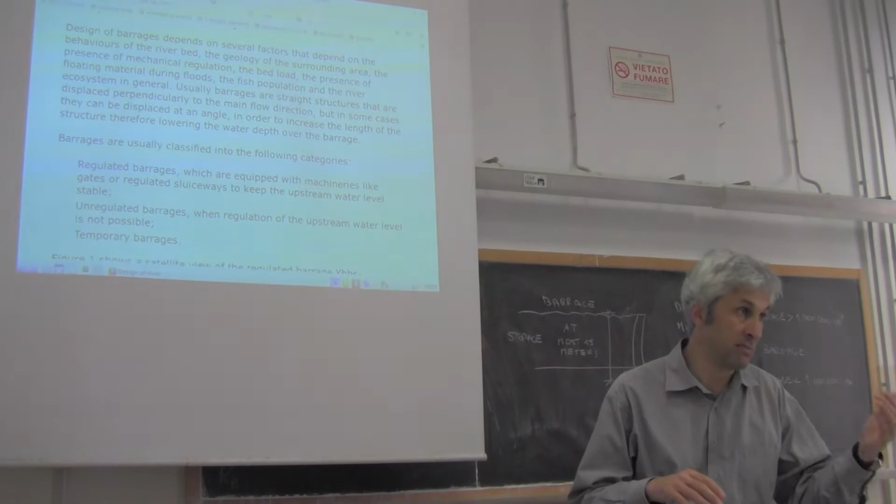Also the environmental impact. There are areas where we need to strictly minimize it. It depends on the accessibility of the place, if it is readily accessible with trucks, with machineries or not. So there are several issues that we have to take into account.

Basically, we concentrate on the hydraulic design. We don't concentrate on the structural design. We don't speak about how to design the concrete structure. We focus, as I said, on the hydraulic design.

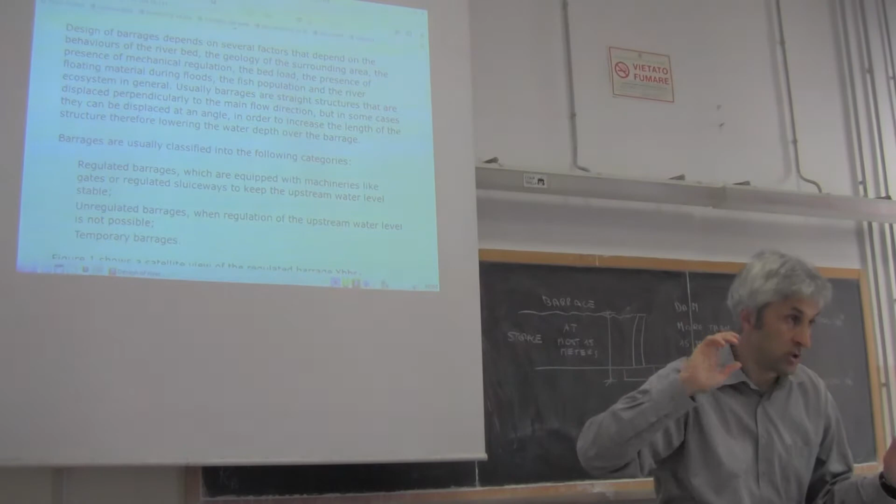First of all, let's take into account that barrages are divided into three categories. The last one, temporary barrages, we don't consider because usually they don't need to be designed. They are frequently used by farmers, for instance.

What they do is at the end of the winter, during the low flow season, they go over the river and with stones, they typically build small dams by putting stones one above the other, diverting part of the flow into canals made every year to divert water to the fields where they need water for irrigation. They are frequently used. Usually they are not designed.

Keep in mind that in order to do this, at least in Italy, we should always apply and ask permission, because water in Italy and in most countries is a public good and therefore cannot be used without asking permission. This is a problem because it frequently happens that people, sometimes in good faith, take water without applying for it and without asking permission.

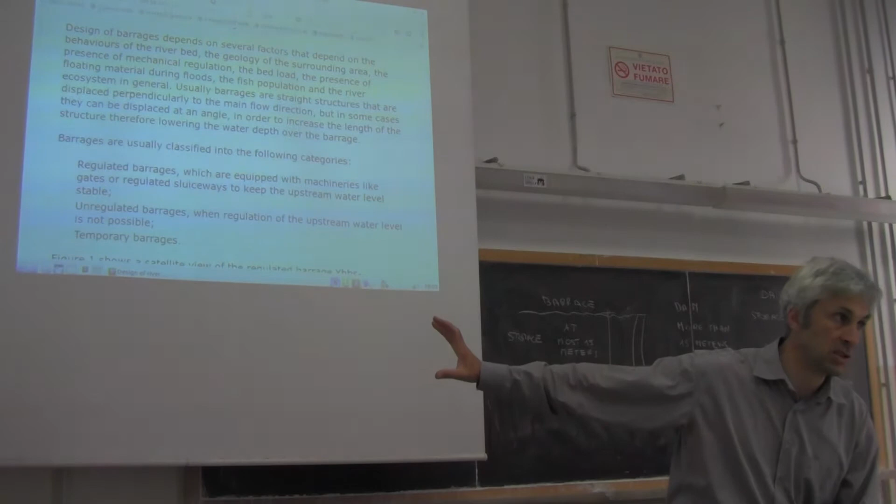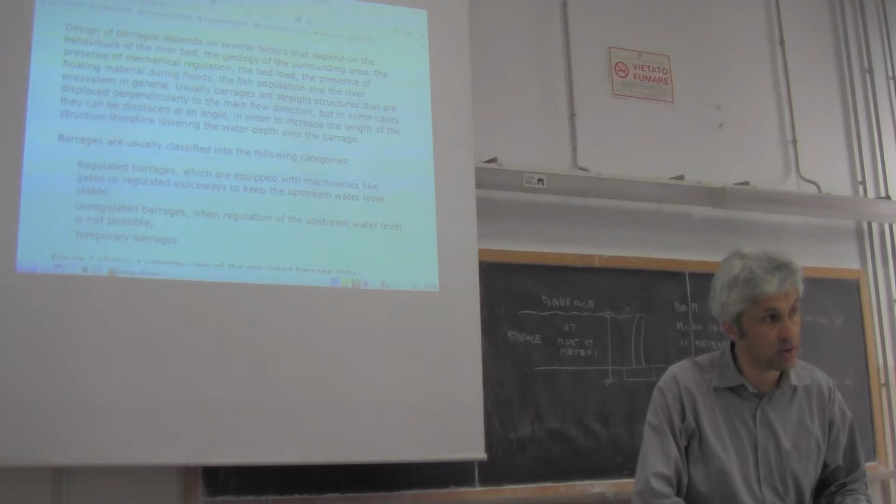Then there are the two categories of permanent barrages, which are regulated and unregulated ones. The difference is that regulated barrages are equipped with machineries like gates or regulated sluiceways. Sluiceways are, in essence, ways where the water passes through the barrage. They can be different types: bottom discharges, weirs. Basically they are passages, and these sluiceways can be regulated because you may equip the sluiceway with a gate. A gate, in Italian called paratoia, is a way to block the passage of water.

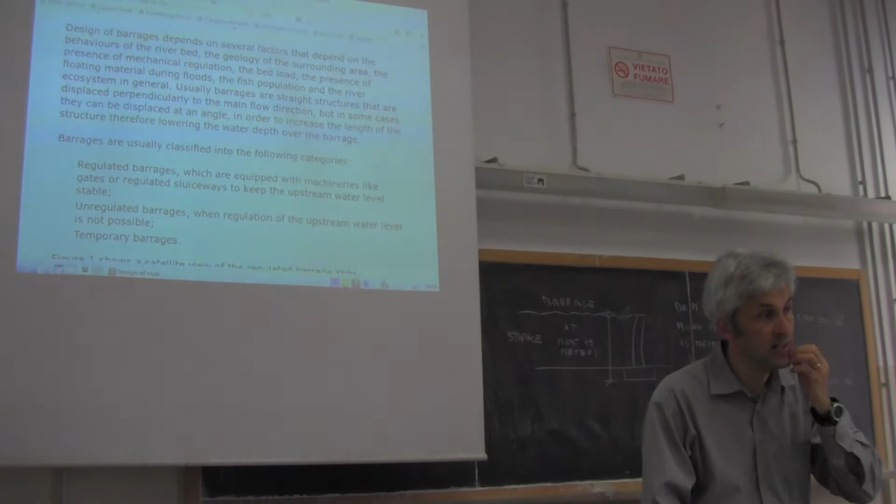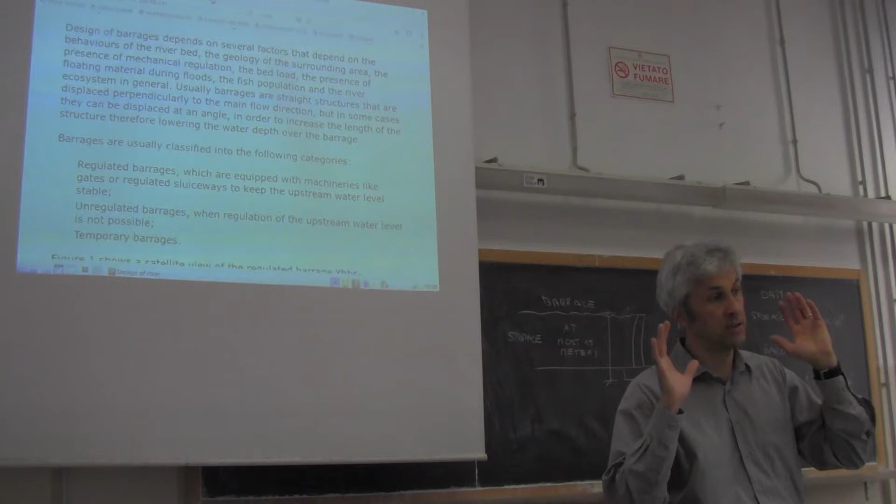What is the meaning of a regulated barrage? It means that if you want to keep the water level upstream at a constant position, with no change during winter or summer, you have to regulate the flow by opening or closing gates. When you get a lot of water from upstream, you open the gates because you don't want the water level to raise up over a certain limit. When you get reduced flow or no flow, you need to close the gates, because if you want to keep the water level with no inflow, you need to close the gates, or almost closed. This is the purpose of a regulated barrage.

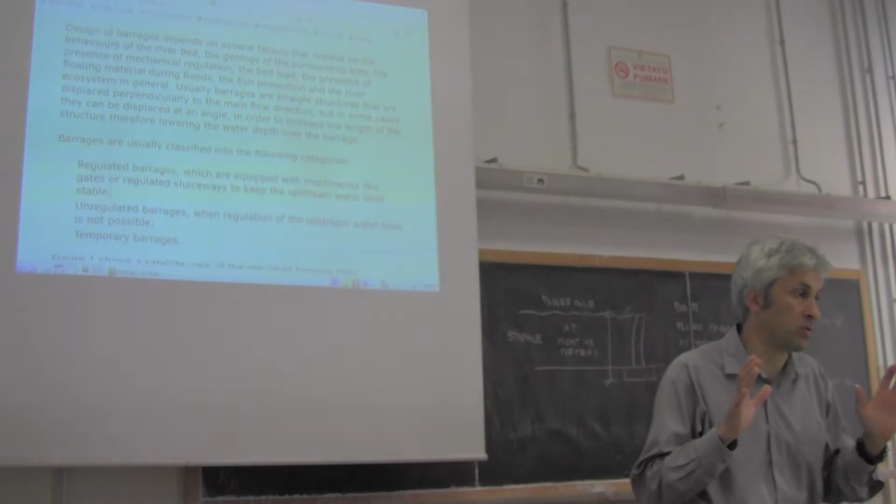Of course, the regulated barrage requires maintenance and management, because somebody, either through a computer code or directly, needs to open and close the gates. Now they are managed in an automatic way, but still there is some human intervention required, at least to check that everything is going fine. So it's a bit complicated. The management is complicated. We require human resources, and we require resources in general.

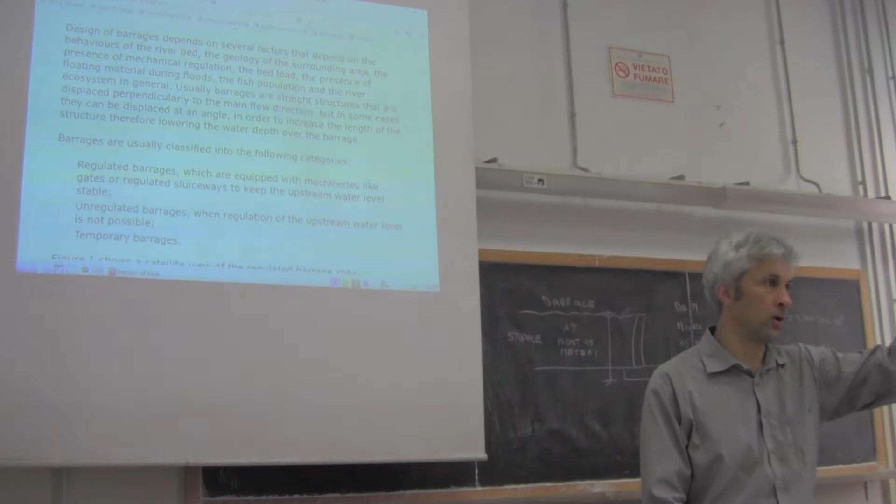Unregulated barrages have no regulation, so less requirements for resources, simpler management, but we have to take into account that the water level upstream may change. When there is a lot of flow, we have the water level raising. When there is low flow, the water level is decreasing, of course, like in a natural river.

So some people say that unregulated barrages are less impacting because there is almost no change in the dynamic of the river. There is a change because you take some water, but still there is variability in the river. Variability, keep in mind, is important for the preservation of the ecosystem. The ecosystem is trained against variability, and if you suppress variability, the ecosystem suffers.

Some people say that unregulated barrages are more dangerous because there is no control, so if you get a lot of flow from upstream, the water level rises both upstream and downstream. A dam, which is regulated, has to store water during winter and release it during summer, and has the advantage that downstream regulation also helps prevent floods.

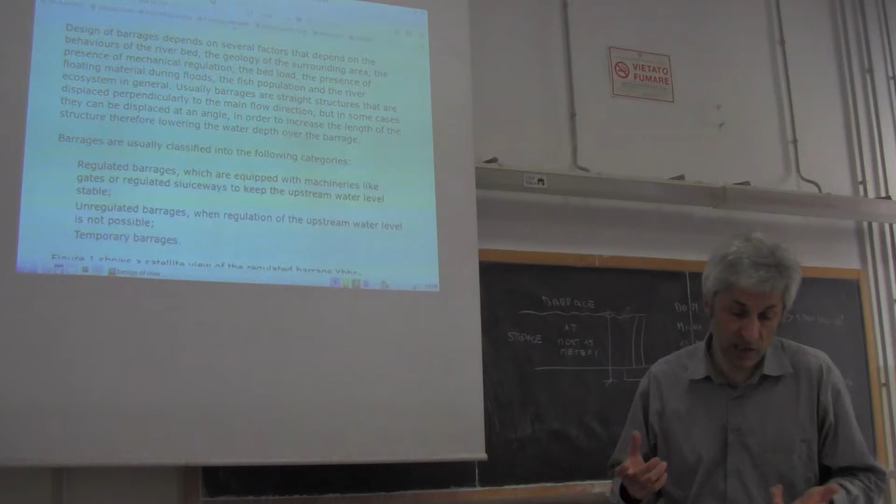So the dam is not only a risk, it may offer some reduction of risk in particular situations. When a huge flood is coming upstream, if the dam has the capacity to store water, the river flow downstream is reduced, meaning a decrease of risk. It's basically a compensation, and the rule of thumb is that when you work on a huge river with an important structure aiming to capture a lot of water, regulation is needed.

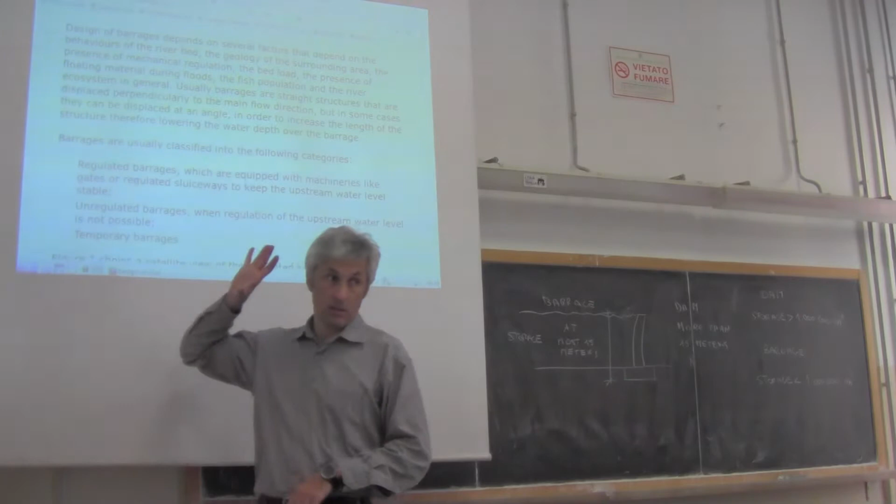When you work on mountain rivers with small infrastructures, we tend to make them unregulated because they are cheaper and the maintenance is simpler. We focus on unregulated ones because these are the structures most frequently designed.

Today there is increasing interest in small hydropower plants and in using surface water for irrigation, because of the development of agriculture and the water-food-energy nexus, which requires getting more renewable energy in a sustainability context. Hydropower is a renewable, clean energy. There is some impact, but it's considered clean.

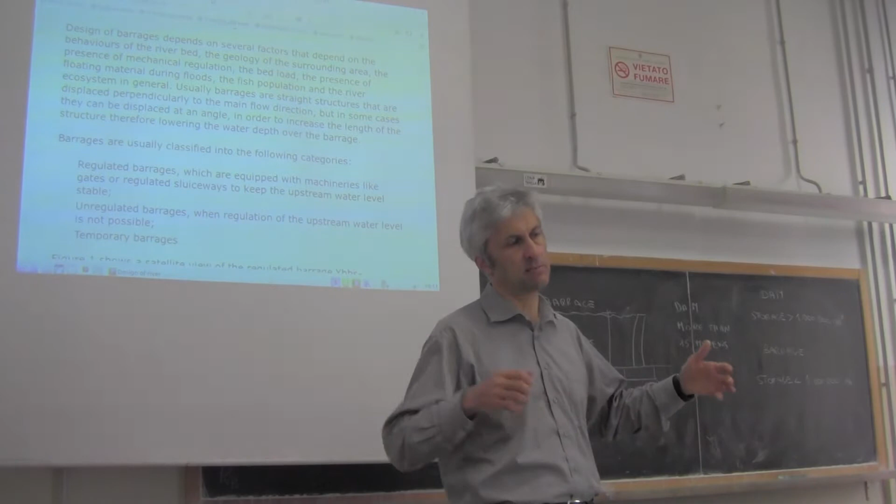These small hydropower plants are often composed of a turbine and also a river barrage that allows water to be withdrawn. Therefore there are a lot of opportunities for designing these small structures.

Regulated barrages, big structures over big rivers, were built a lot in the past. We realized that the environmental impact is very severe, and therefore today they are less frequently designed. Keep in mind that all the big rivers of Europe are regulated, with one exception: the Po River.

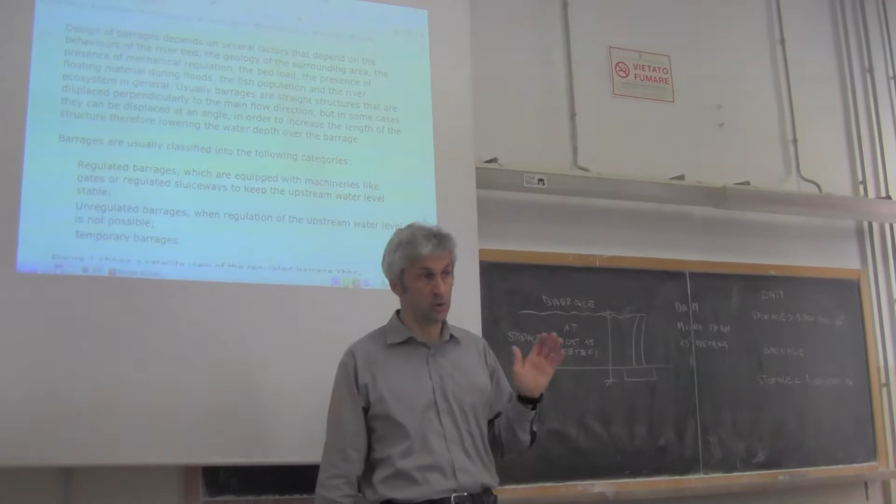Along the Po River there is only one big barrage, the hydropower plant of Isola Serafini. It's the only one. There were plans for barraging the Po River, even recently.

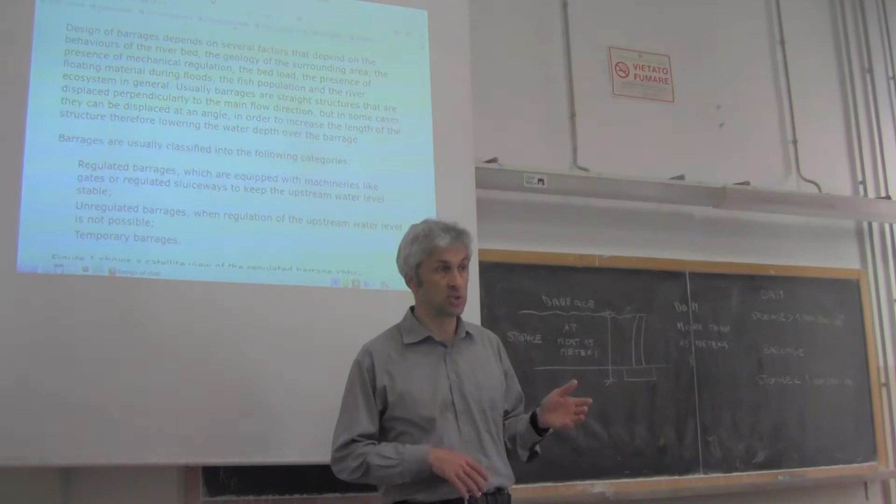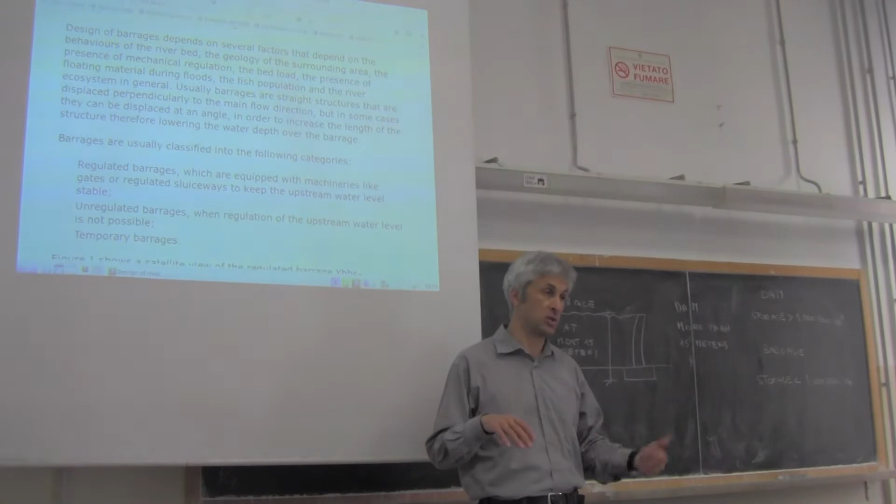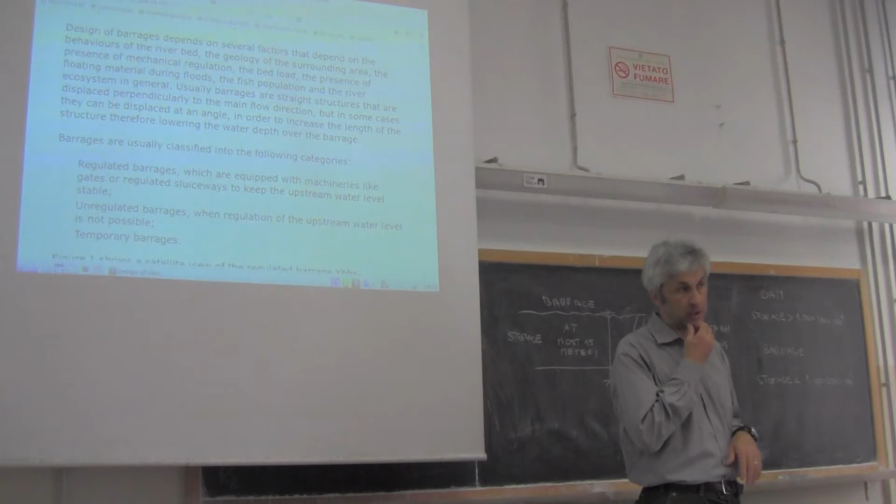But there were concerns related to environmental impact, because we observed on other rivers like the Danube and the Rhine in Germany, which were equipped with a lot of barrages also to favor navigation, that the impact is extremely relevant. There is reduced variability and reduction of river flow, because you need to store water to ensure navigation. As a result, the river flow is reduced and the concentration of pollutants increases. So there are several concerns.

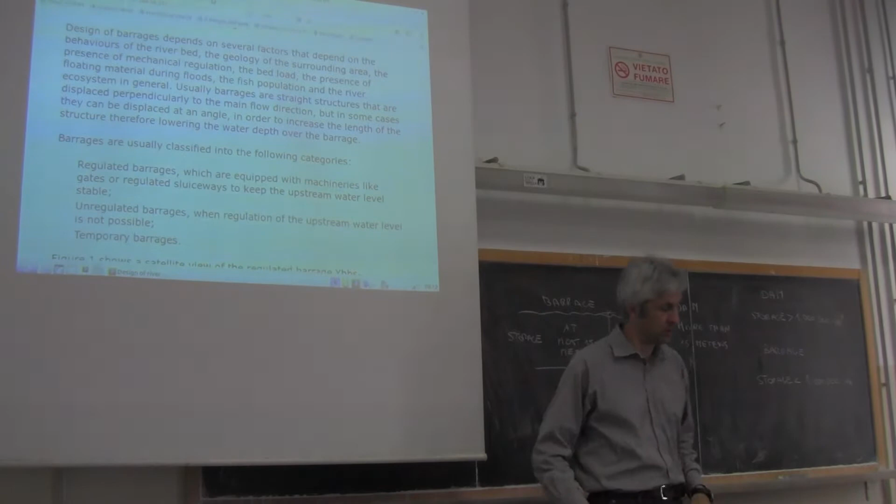Okay, let's have a look at this figure, which is a link on Google Earth. You can zoom it, and this is a barrage over the Danube, with the name of the barrage shown here.

What's interesting here is to zoom it, because you can get to a level of detail that is extremely refined. You can see there is a road that passes over the barrage, and you see the gates here. These are equipped with gates because it's regulated.

On the two sides, the Danube draws the border here, I think between Hungary and another country, we'll check it, it's not really important. There are two hydropower plants, one on each side, to make sure that the two neighboring states can both use this barrage for producing hydropower.

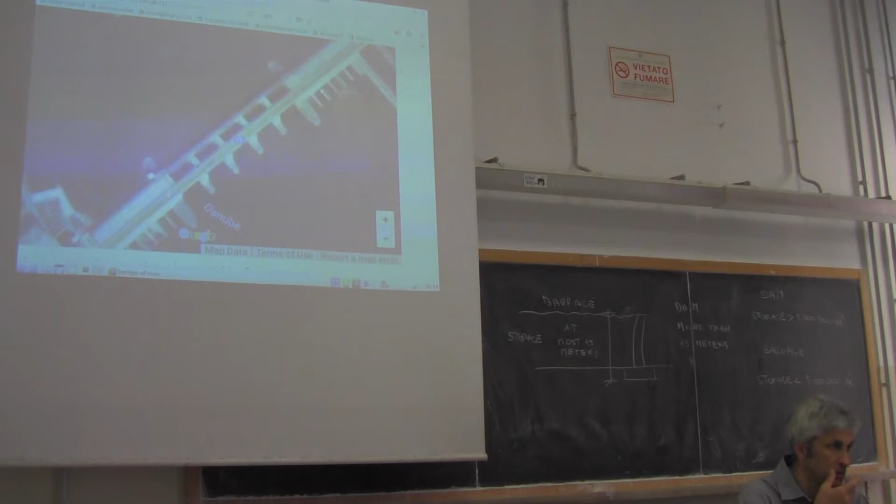The barrage creates a jump, a difference in elevation between upstream and downstream. So instead of allowing the water to freely flow, you force it to flow through a turbine and produce hydropower. Keep in mind that barrages may have multiple purposes, for instance irrigation, but when you release water downstream you can turbine it, getting some hydropower too.

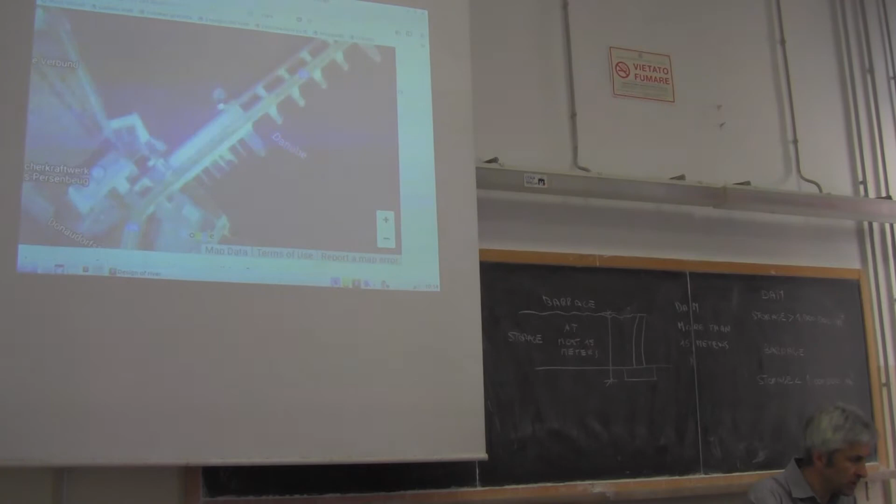In a sustainability context, we look for multiple uses, and this is an example. What's interesting to see here is the presence of the navigation lock, which is here.

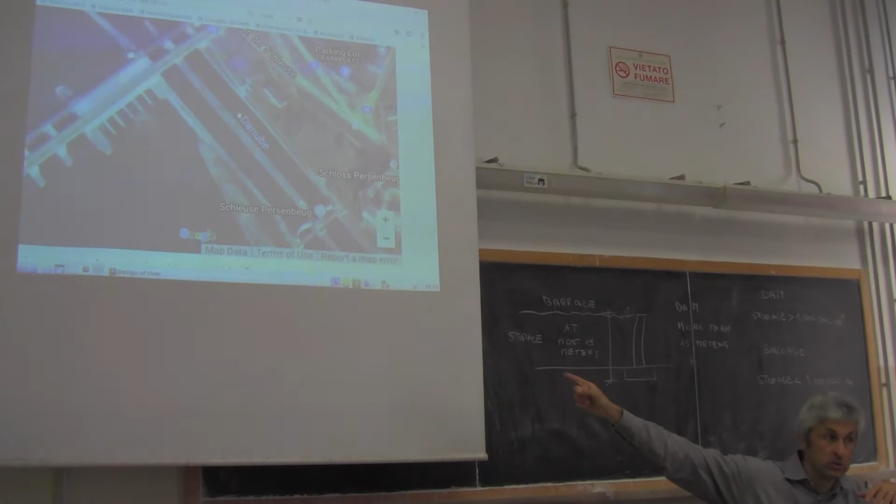I'm not sure whether you know what a navigation lock is. It's a passage for ships, because another purpose of this barrage is to make sure the Danube can be traveled by ships. Of course, when there are these jumps, we need to build a structure to allow ships to climb up or go down, and these are the navigation locks.

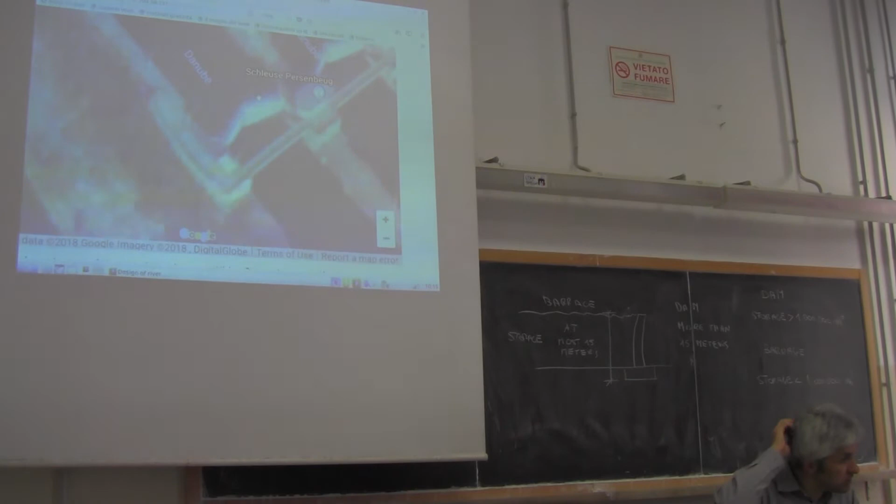I'll give you a detail in a second of what a navigation lock is. Look at the downstream end, there is this gate, let's zoom in. This gate here, which I'm highlighting with the mouse, is called a Porta Vinciana, also in English.

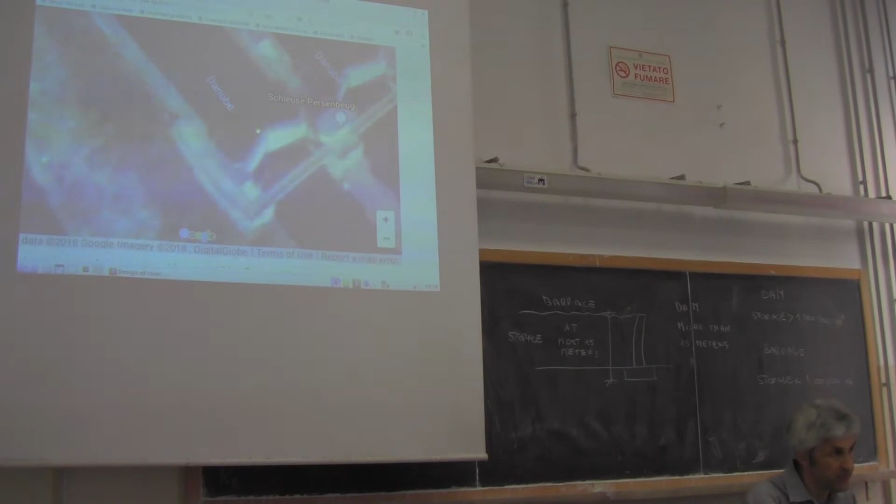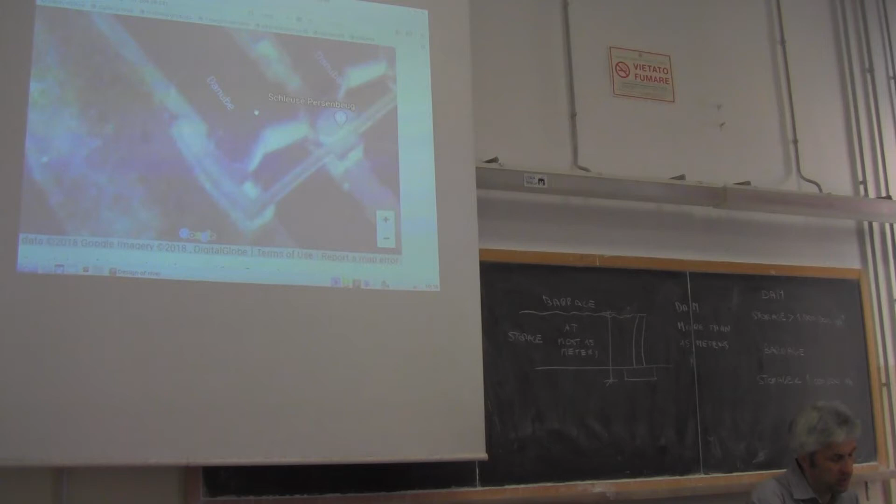It seems this gate was not actually invented by Leonardo da Vinci, but its purpose is that the pressure of water from upstream helps keep the gate closed. So when water is accumulating upstream, the pressure helps the gate prevent leakage.

Okay, let's see a detail on the navigation lock. I hope there is the link here, let me see, one second.

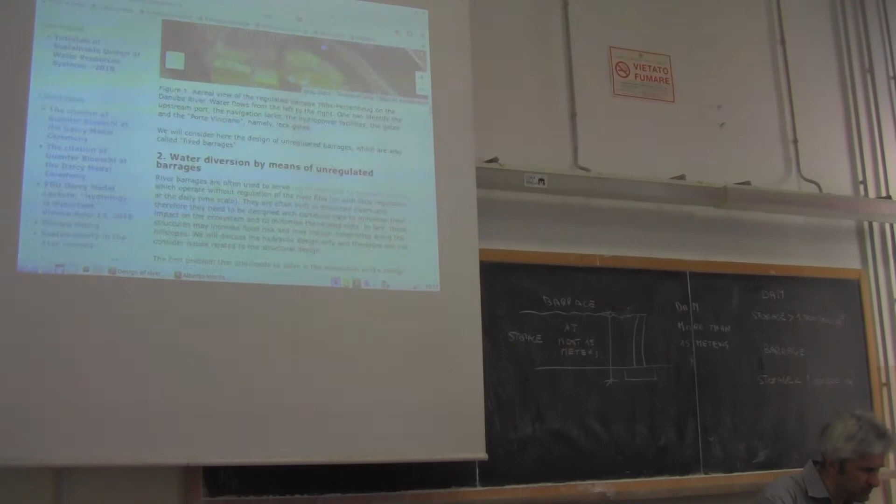There is not the link here because this is a former version of the web page. There is already online the new version, let me see. I'm using two different versions of my web page, one to be projected, and another one to be read. If we go to the online version, it's already updated because I updated this yesterday, and it's automatically updated every day in both versions, but it's still not updated. Even here I can see the link, so I need to check.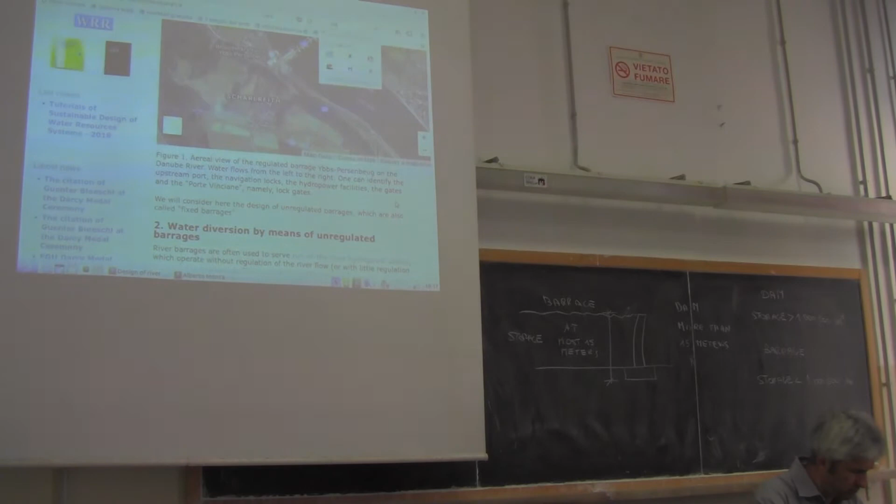Navigation lock, okay, this is the page that I wanted to show you. I need to check why there is no... okay, this is how it works. So basically the navigation lock is done. Let me see, I think I need to enlarge it. No way.

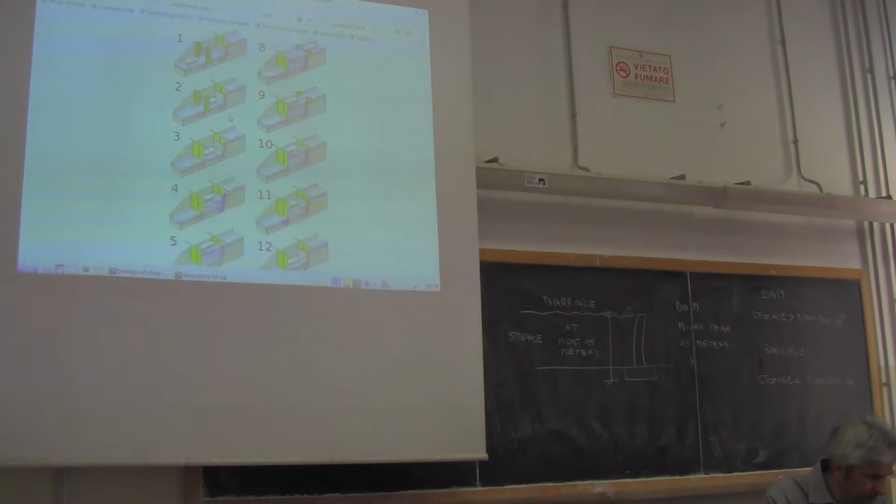So this is an example, a sketch of a boat climbing from downstream. Basically there is the Porta Vinciana that is first open up there, number one, and the boat gets into the middle stage, and then the boat gets into here. The Porta Vinciana is closed, and therefore the upper Porta Vinciana is opened in order to let water flow from upstream to downstream, raising the boat.

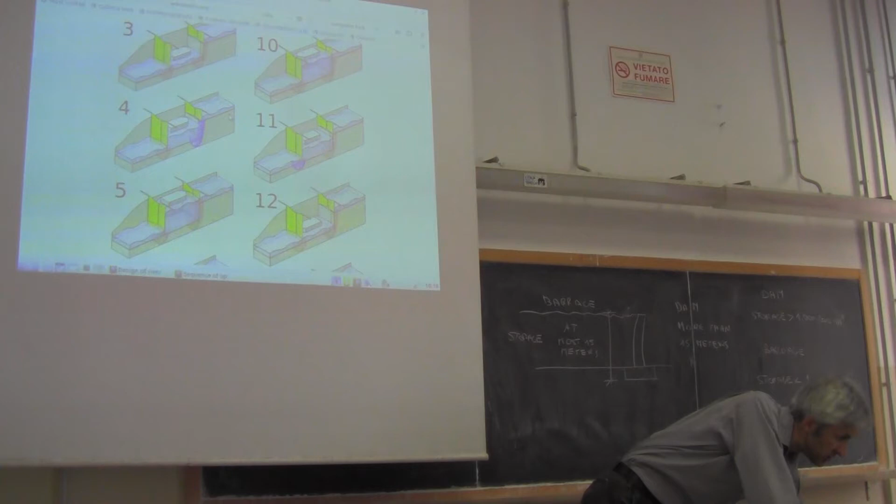If we go down, you see there is a partial opening of this Porta Vinciana in order to let the water flow here, and then the upper Porta Vinciana is completely open, and the boat can go upstream. A similar procedure is repeated for jumping down. Okay, and I did this to show you.

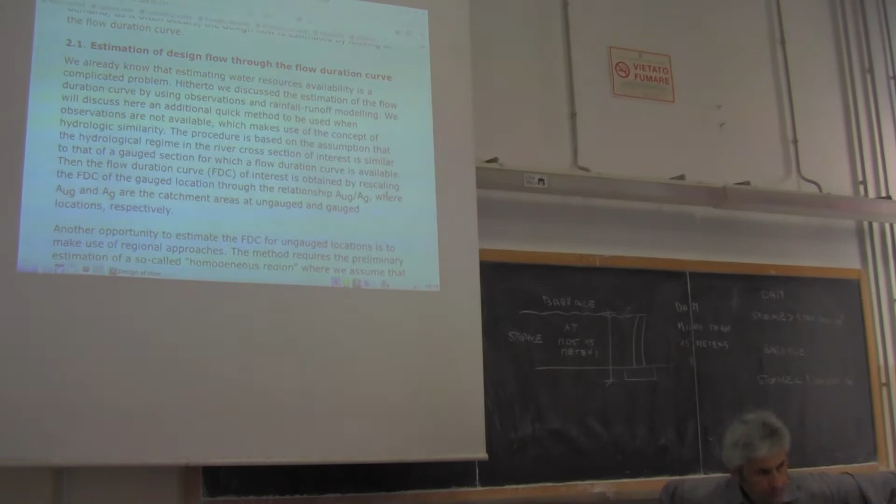So let's focus on the design. The first thing that we need to design for a river barrage is the water withdrawal, so to estimate the design flow. With design flow, we mean the flow of the diverted water, and this is to be designed based on the flow duration curve. So here there is something repeated from what we already know: basically, we need to estimate the flow duration curve, and we also need to estimate the water demands.

There are two possible options. Either we have plenty of water in the river, and therefore we estimate the design flow based on demands, meaning we don't get all the water from the river, we get only a part, so water resources availability is not a problem. In that case, we need to estimate the demands, also for the future, based on demographic expansion, agricultural expansion — a social analysis is to be done — and then, basing on the expected lifetime of the structure, we estimate the water demands for the future and design based on them.

Still, sometimes it may be convenient to get more water because we can turbine the excess water, for instance, and release it back into the river.

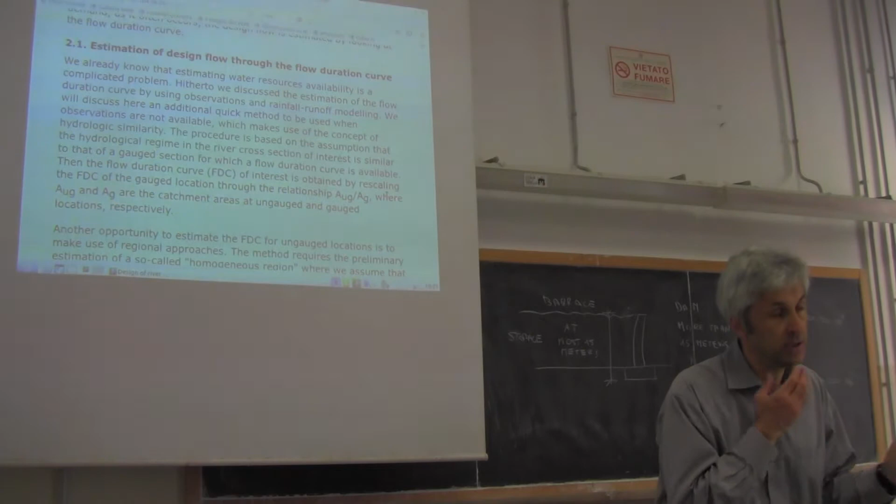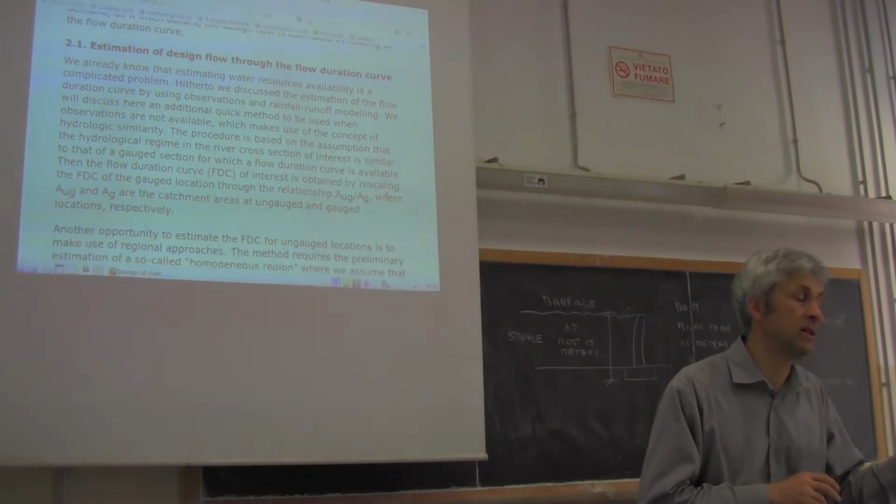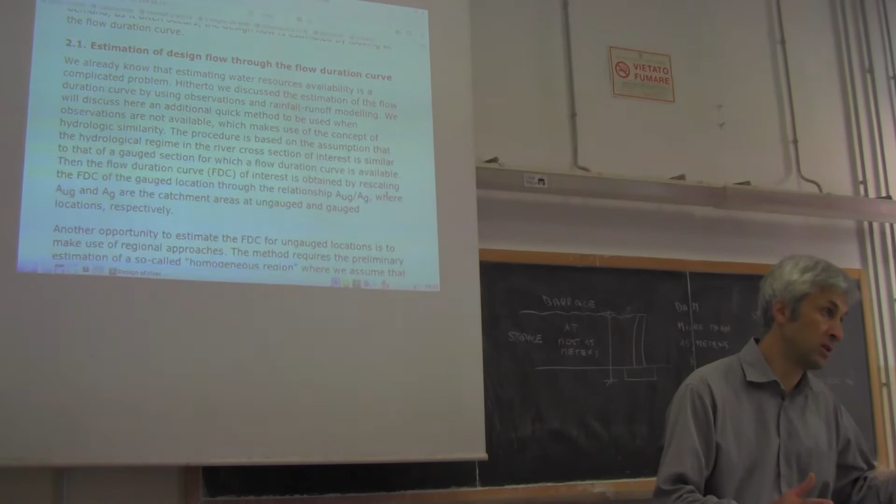Keep in mind this is a relatively new requirement. In the past, we designed dams and barrages to get all the water from the river, and this was up to 1980, 1990 in Europe. Then rules were introduced in member states imposing the release of the environmental flow, also for existing structures. This is a compelling and very demanding requirement. In some cases it introduced crises, because once a community is used to having a certain flow at disposal, if you reduce the flow after the community got used to it, it's a problem.

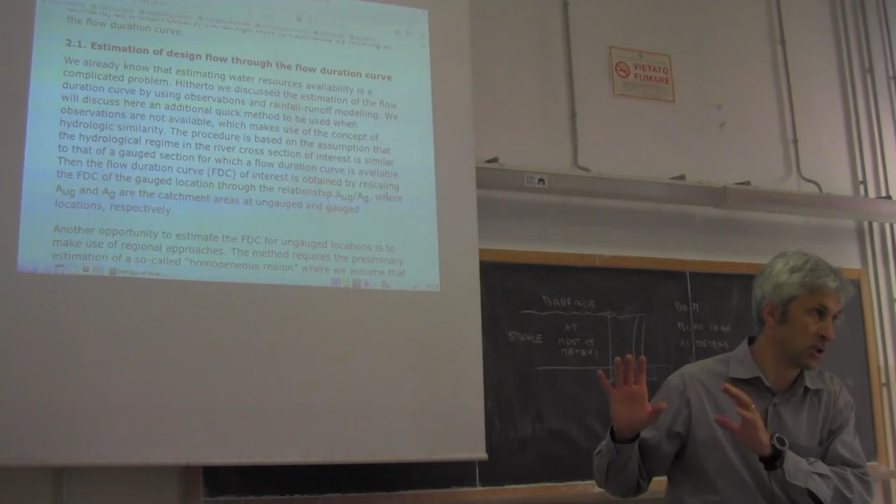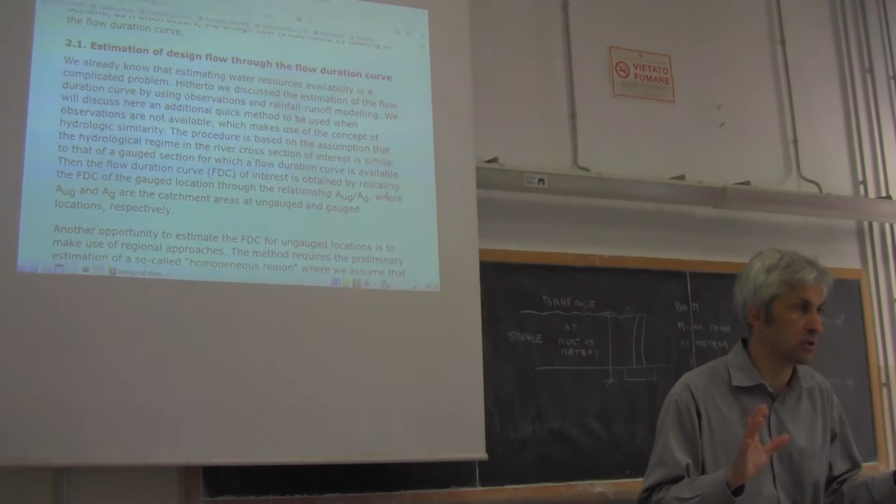Also keep in mind that monitoring the environmental flow is extremely difficult — it's hard to make sure it is released, because sometimes it's complicated to measure. So even if the manager of the structure is in good faith, sometimes it's not easy for them to make sure they are releasing the environmental flow. It's also very difficult to monitor, since many of these structures are placed in locations that are not easy to access. So still today it's an issue, because it's something that is evolving. But this is the most frequent situation: very frequently, water demands are higher than water resources availability.

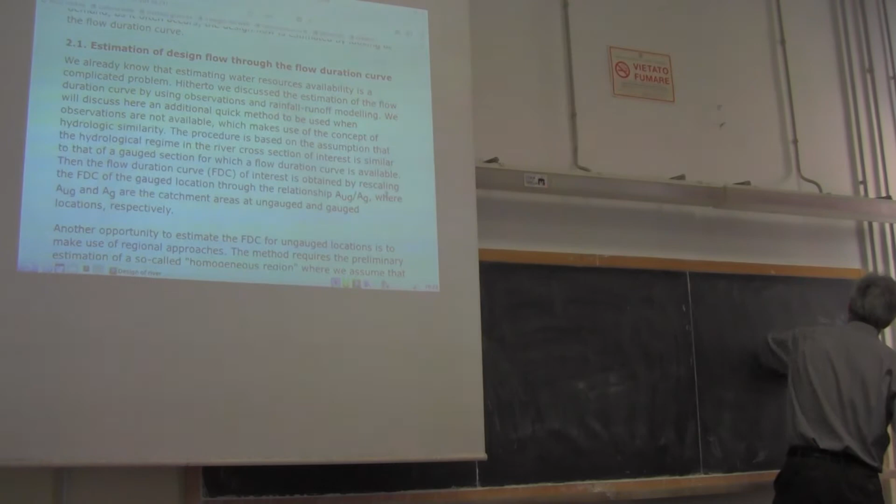Okay, so we know how to estimate the flow duration curve. We talked about estimation based on data and based on rainfall runoff modeling. I just wanted to mention a third opportunity for ungauged locations, which is the most frequent case. Data are available for gauged locations.

Where we don't have data, we can use rainfall runoff models, or other indirect methods of estimation. There's one method I wanted to introduce at this stage, a kind of B-plan for situations where data are not available and building a rainfall runoff model may be complicated or not feasible. This is a simple option frequently used in practice, which is to refer to a close-by gauged location.

So for instance, let's suppose we have to build a dam here. This is our site of interest, and it is ungauged. So what we do is refer to a gauged close-by location. Close-by means the closest one.

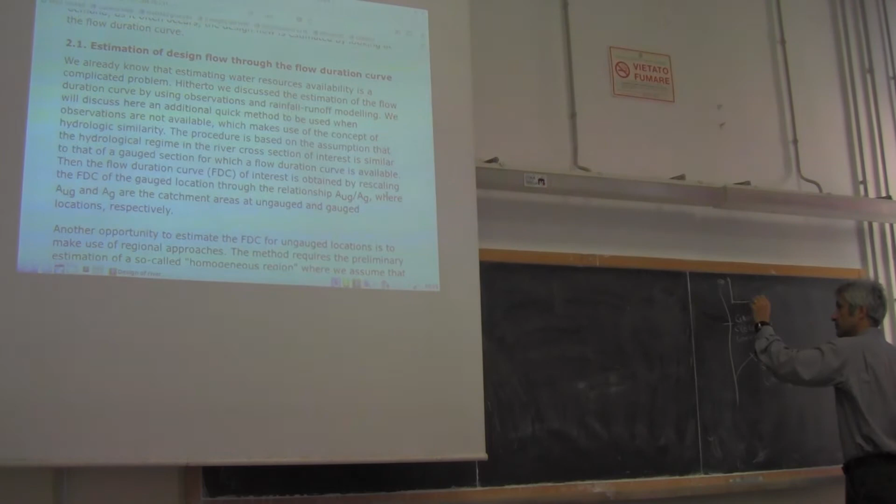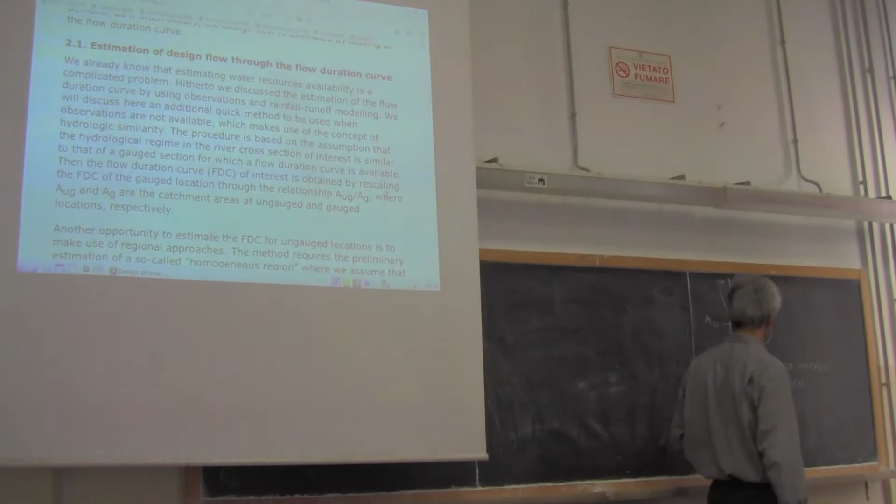Here we have a flow duration curve, Q, D, for the gauged location, and a contributing area which we call AG. Contributing area means the area of the catchment contributing to the river flow at that location. At the ungauged site of interest, the flow duration curve is unknown, Q, D, question mark, and we have a contributing area which is AUG, A ungauged.

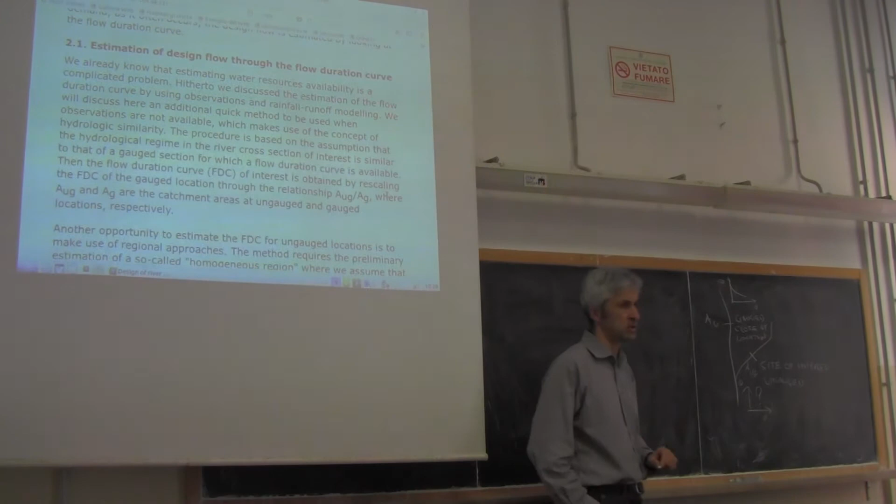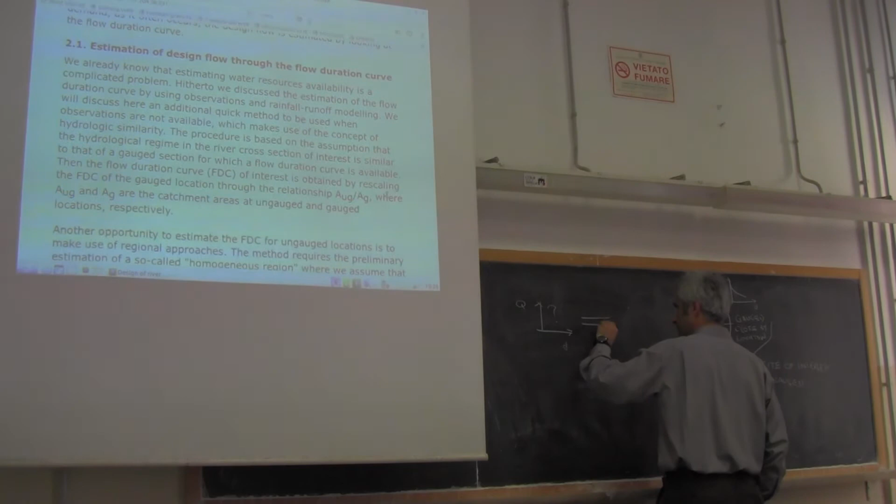So all we know is the contributing area, and what we do is obtain the unknown flow duration curve by rescaling, through the ratio AUG divided by AG, the observed flow duration curve at the gauged location.

What does rescaling mean? It means that Q ungauged of whatever duration d is expressed by simply multiplying the corresponding Q gauged for the same duration d by the ratio AUG divided by AG.

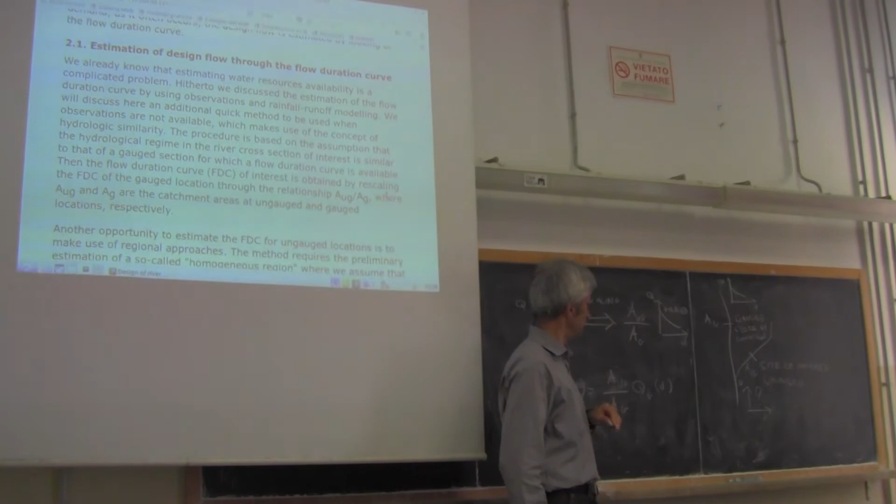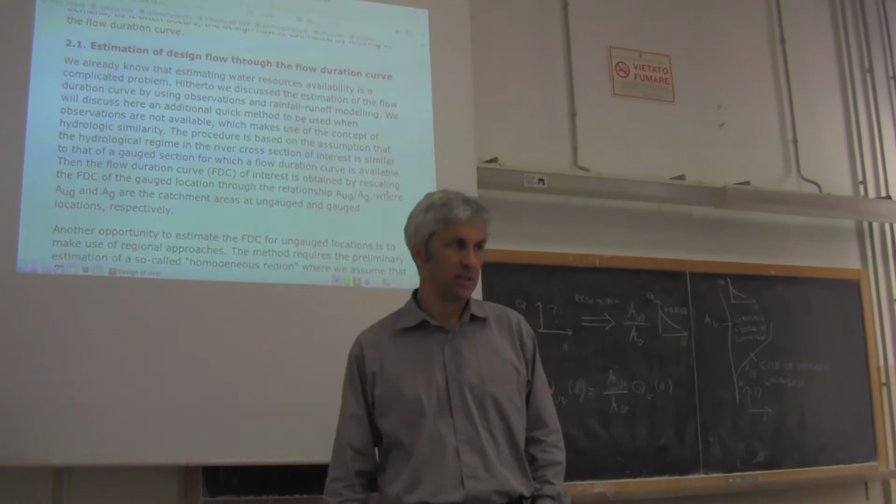So if you have the same contributing area, you simply equate the two flow duration curves. If the contributing area at the ungauged location is, for instance, half of that at the gauged location, you simply multiply the observed flow duration curve by 1/2 and you get the unknown flow duration curve. It's a simple rescaling based on the ratio of the contributing areas. You understand that it's extremely simple.

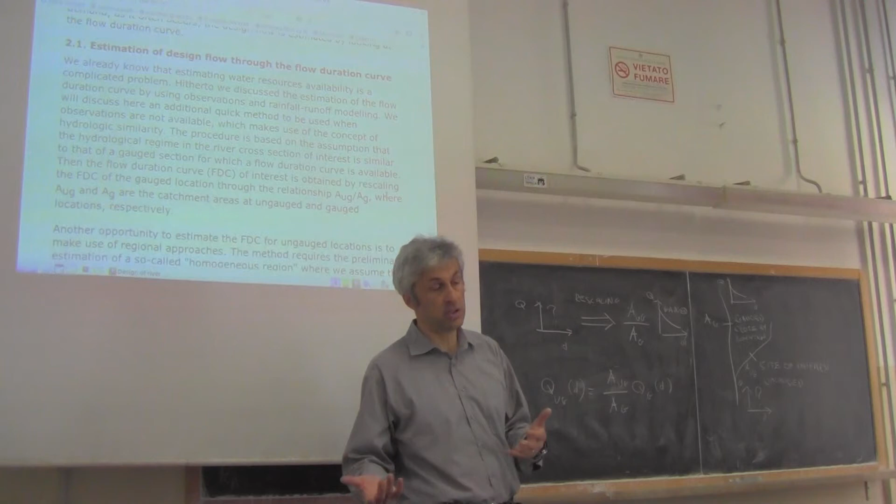It's also uncertain. By intuition, being very simple, it's also uncertain. But if the two locations are not very far away, it is reasonable. If they are close by, you have the same climate, same geology, same river dynamics, and therefore it's reasonable to assume the river flow is proportional to the catchment area.

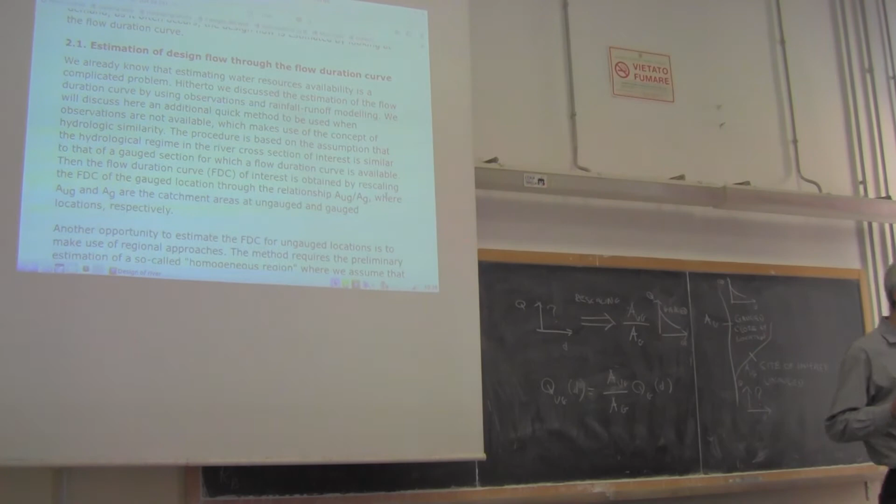Usually river flow doesn't depend only on catchment area. It also depends on climate, geology, evapotranspiration. But if the two locations are close by, you can assume they have the same climate, geology, orography, and evapotranspiration, and therefore rescale the flows by the contributing areas. Of course it doesn't work if the two locations are very far away. Different climate, orography, geology, completely different situation. We know that very different rivers have very different specific river flow.

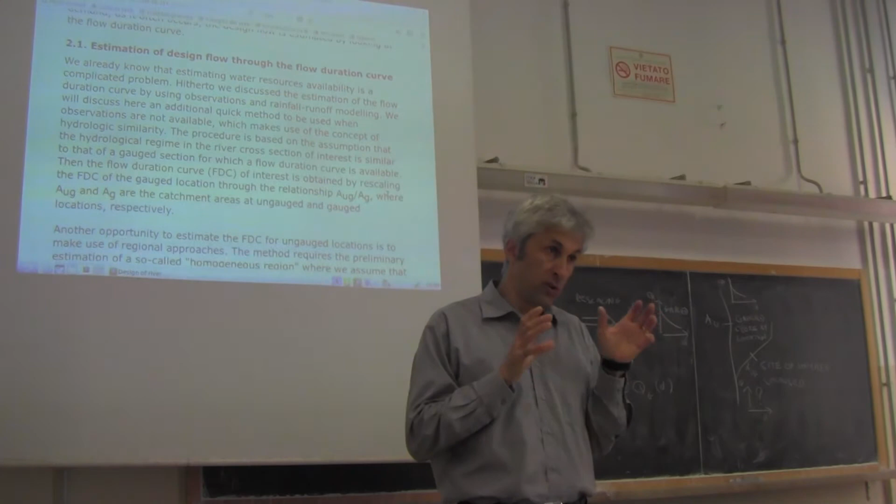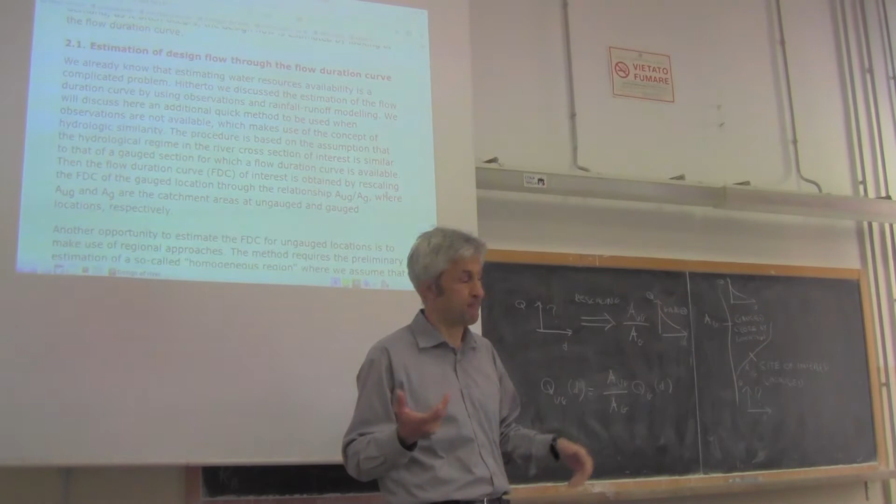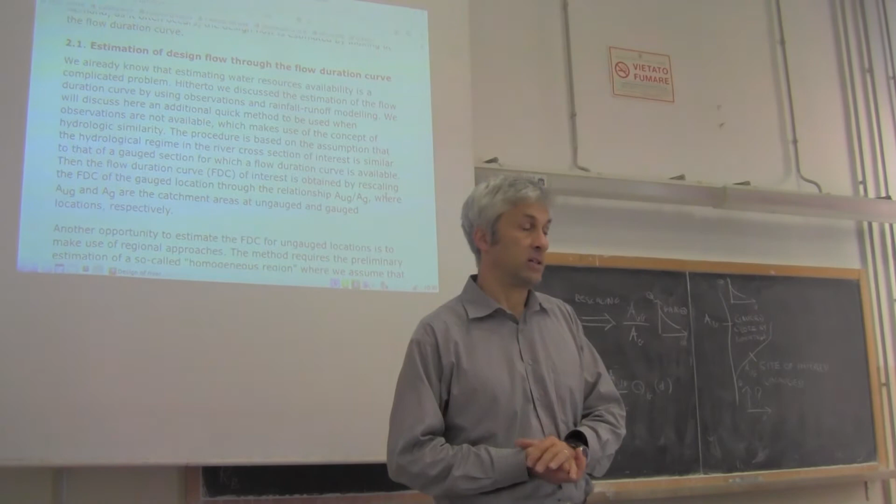Specific means per unit area. If it rains a lot, we have a high specific river flow. If the catchment is very small, the specific river flow is very high. If the catchment is larger, the specific river flow is lower. But if the two catchments are close by and not very different in size, that's fine. So you have to be concerned when this ratio is very different from 1. If the ratio is 0.01, meaning a difference of two orders of magnitude, you have to be careful. If one catchment is 1 square kilometer and the other is 100 square kilometers, the behavior is different. But if one catchment is 20 square kilometers and the other is 40, that's fine.

This is called hydrologic similarity. So when you say you applied hydrologic similarity, it means you are scaling a river flow by the contributing area of the catchment.

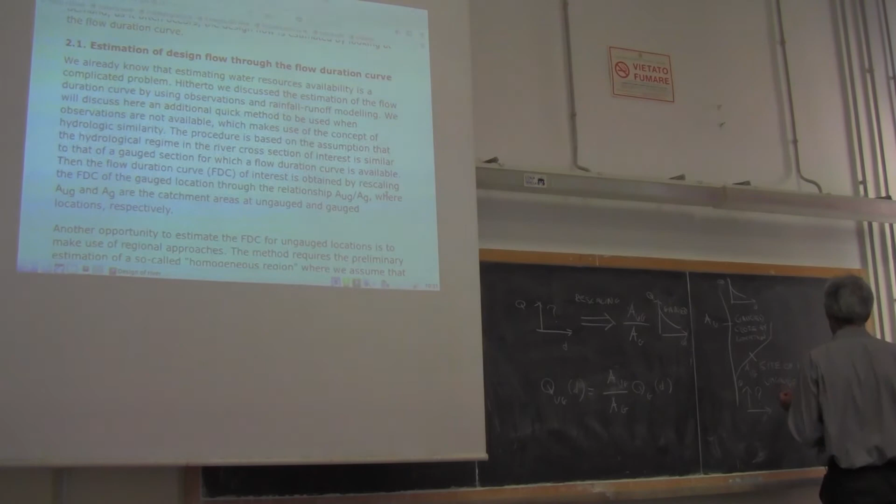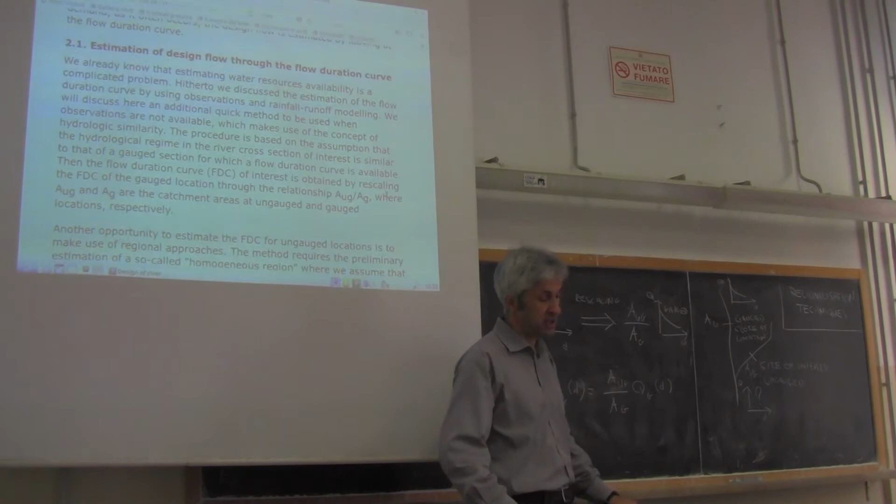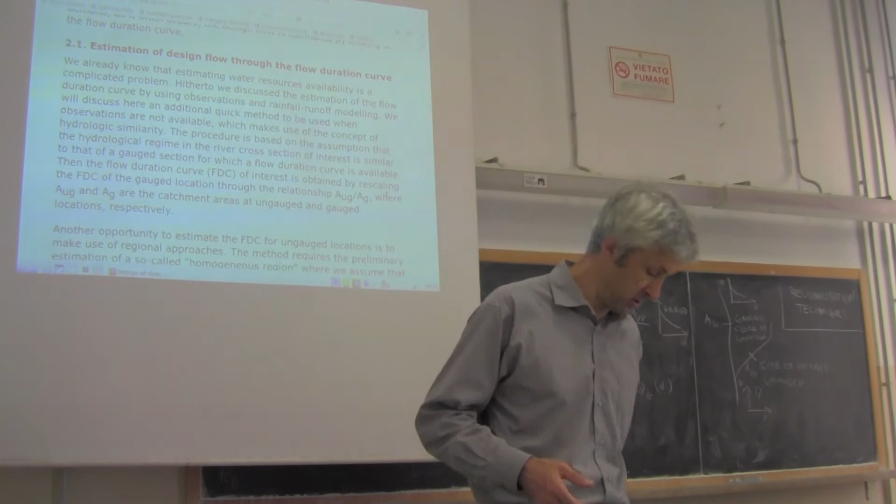There is also a class of procedures for doing the same thing, called regionalization techniques. We don't focus on them, I just want you to know the term. Regionalization includes hydrologic similarities, meaning to estimate river flow based on regional behaviors. There is a class of methods that includes several techniques used for this purpose, but again we don't focus on them.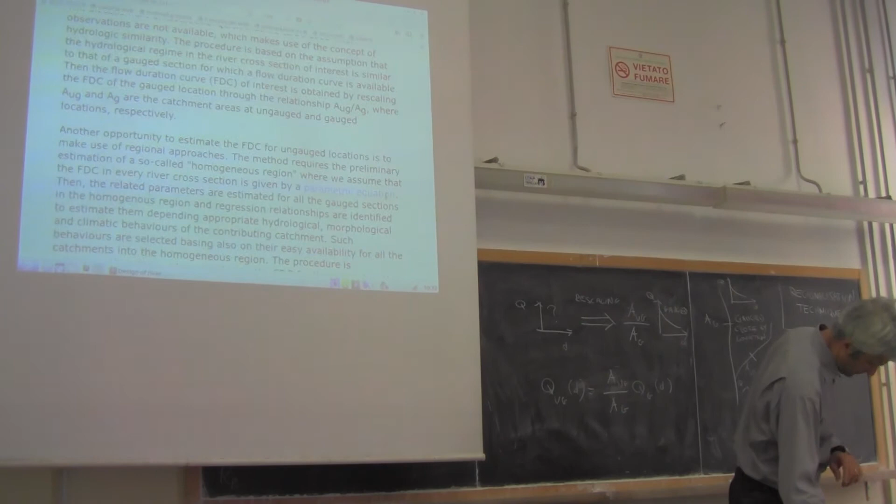Now let's suppose we know the flow duration curve, and ask how we can design the design flow. When we design water withdrawal river barrages, usually we are required to make at least two designs, a preliminary one and a final one. In some cases we are required to make three of them.

The preliminary design helps us get permission to move forward. We need to apply for a governmental permission to use the water, and the authorities require that we present a preliminary design first. They don't want us to make a final design and then say no, so they ask for a simpler preliminary design. Still, you have to define the design flow. Once permission is obtained, you move forward with the final design.

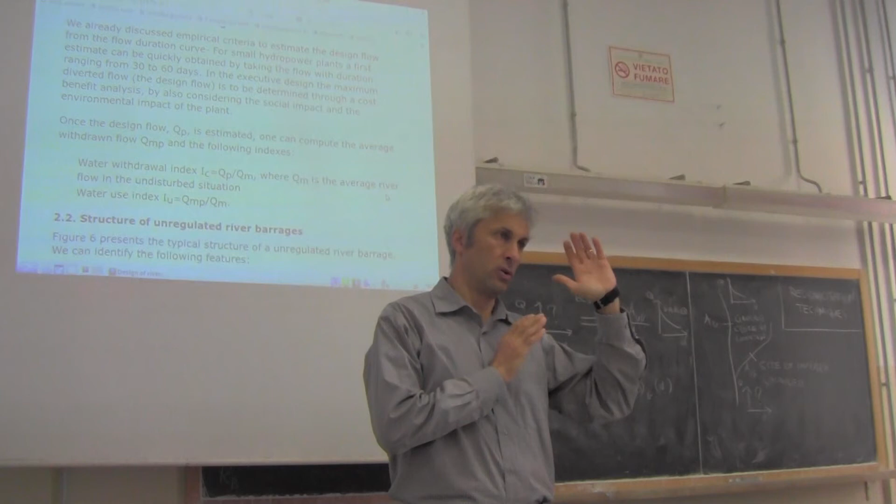For the preliminary design, we often use rules of thumb to estimate the design flow. A typical rule of thumb, which I already mentioned, is that for a water withdrawal, the design flow is the flow on the duration curve corresponding to a duration between 30 and 60 days. This is usually the optimal design flow. So once you know the flow duration curve, you go in between the flows with durations of 30 and 60 days, somewhere depending on your needs, and fix the design flow in this way.

For the final design, you need to make a cost-benefit analysis. We already discussed that a higher design flow increases benefit, since you withdraw more water volume, but also increases costs. Decreasing the design flow reduces the benefit but also reduces costs. There is an optimal value to be identified through cost-benefit analysis: you estimate the benefit, the construction and maintenance costs, and then find the design flow that gives the best compromise.

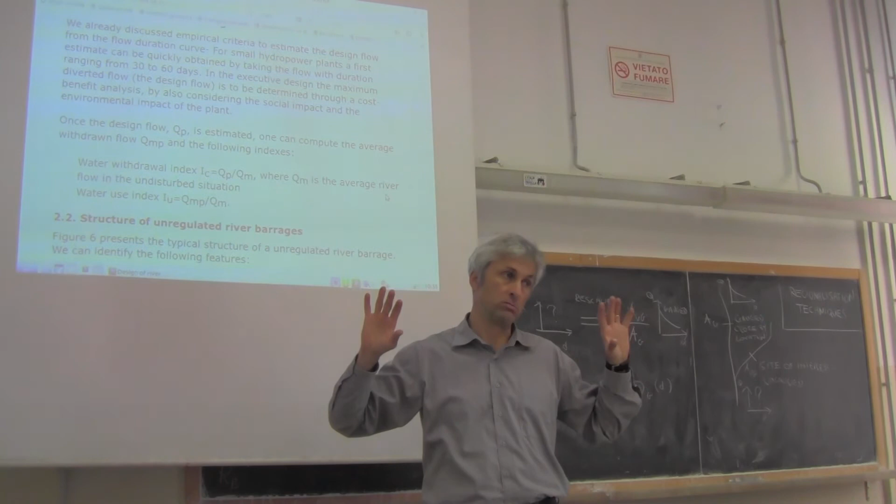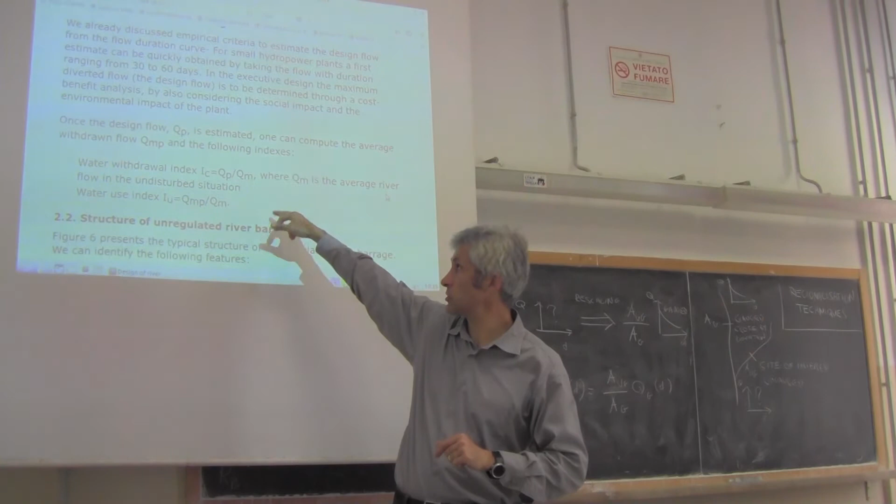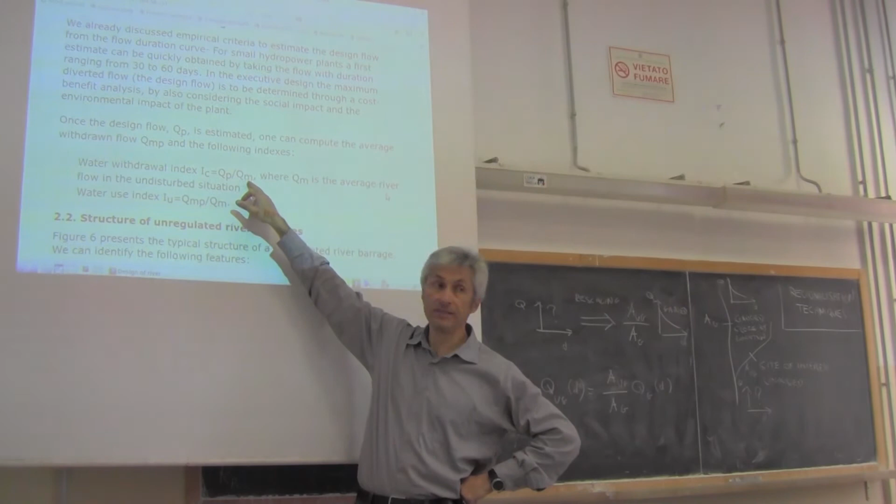Once you define the design flow, we can estimate the water volume withdrawn on average, with uncertainty, remembering how the flow duration curve is defined over a year. We can also compute two indexes already mentioned: the water withdrawal index, the ratio between the design flow QP and the average flow in the river, and the water use index, the ratio between the average flow diverted from the river and the average flow in the river.

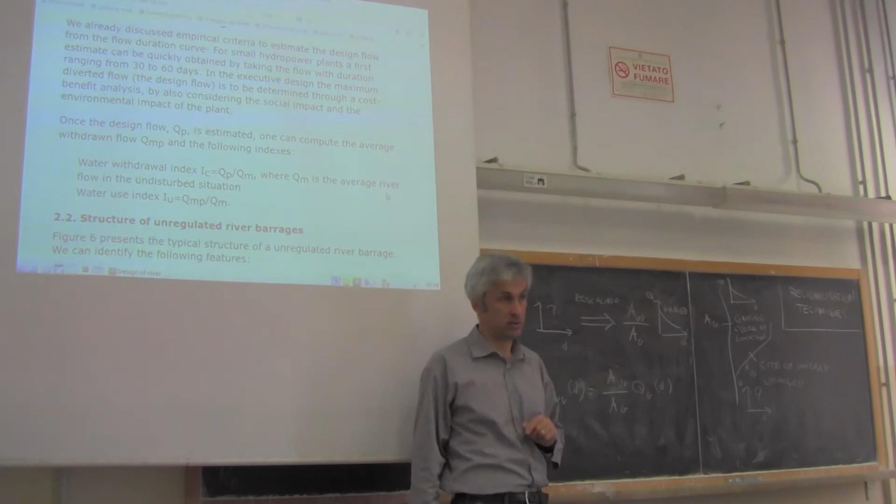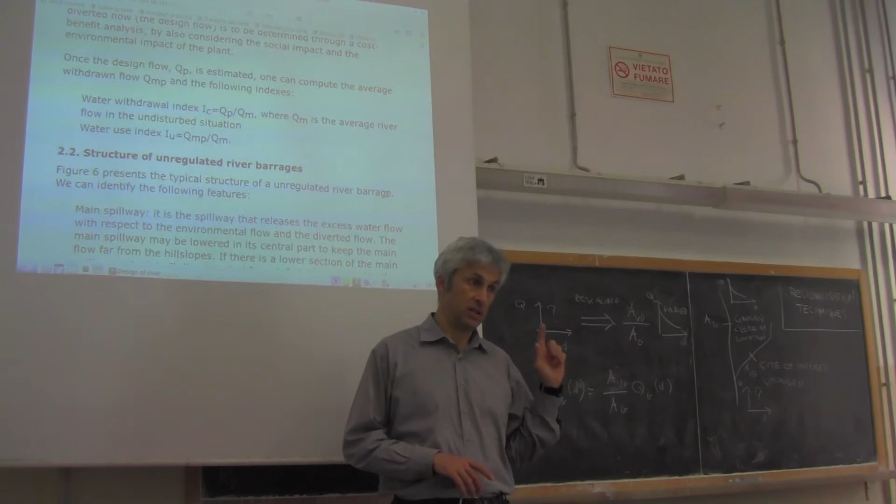These are very simple indexes. I may ask about them at the exam, just because it's a simple question. Now, with the design flow we are done, since we've already discussed the flow duration curve extensively, and you can now see why it is important in more detail.

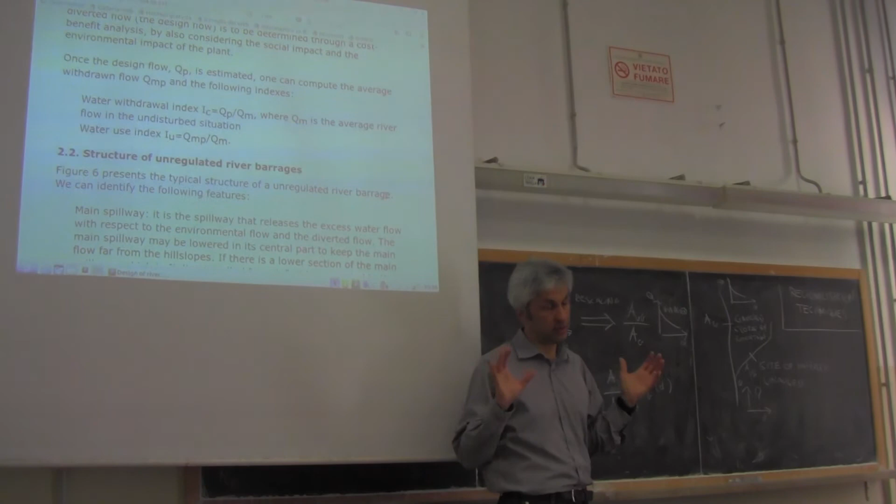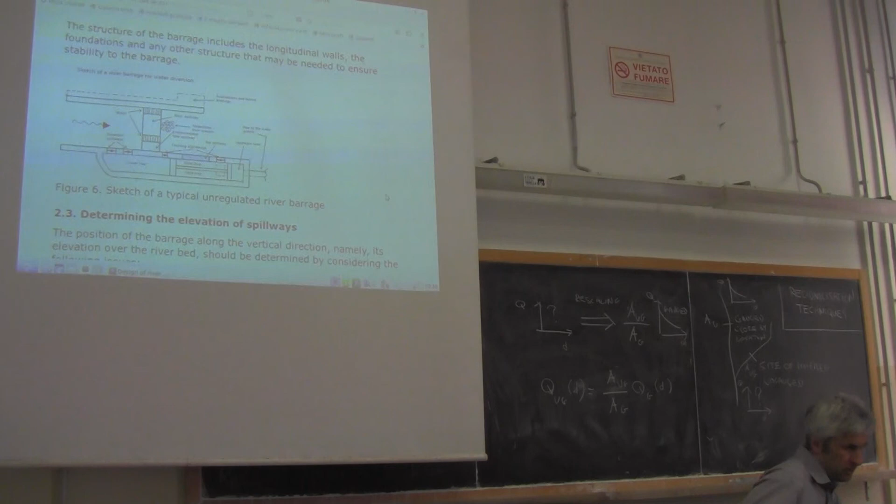Now let's talk about the structure of a typical barrage. There is a figure here, let me increase its size. This is a handmade sketch, made by me, so it's not perfect, but engineers usually are not good artists. Today we are saved because we use AutoCAD and computer programs to draw; in the past, hand drawing was the main problem for engineers.

Let's move forward. This is the river flowing from upstream to downstream. What are the main structures? Usually we build lateral walls to drive the flow toward the barrage. These walls are not always present; usually they are built to prevent erosion of the hill slopes in correspondence with the barrage.

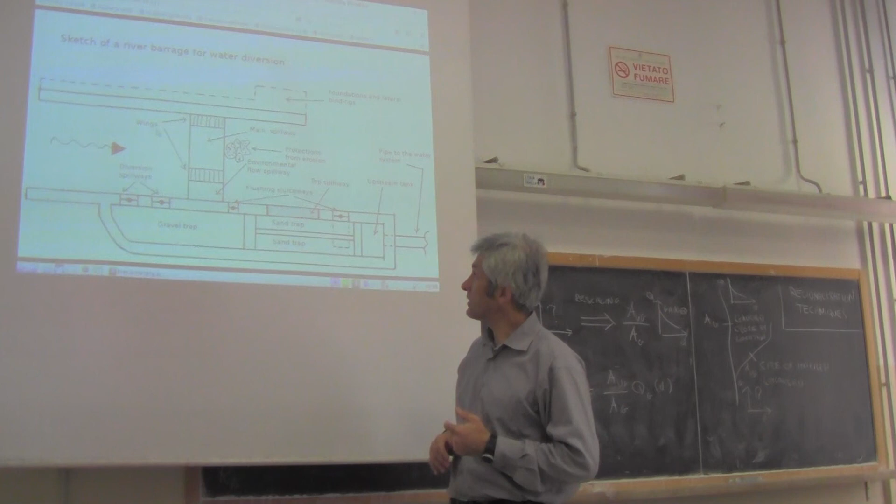Then we have the transversal structure. Its purpose, which is not regulated, is to fix the elevation of the riverbed and stabilize the water elevation upstream. During high flows this transversal structure needs to be surmounted with good efficiency, because during floods we don't want the river level upstream to increase a lot.

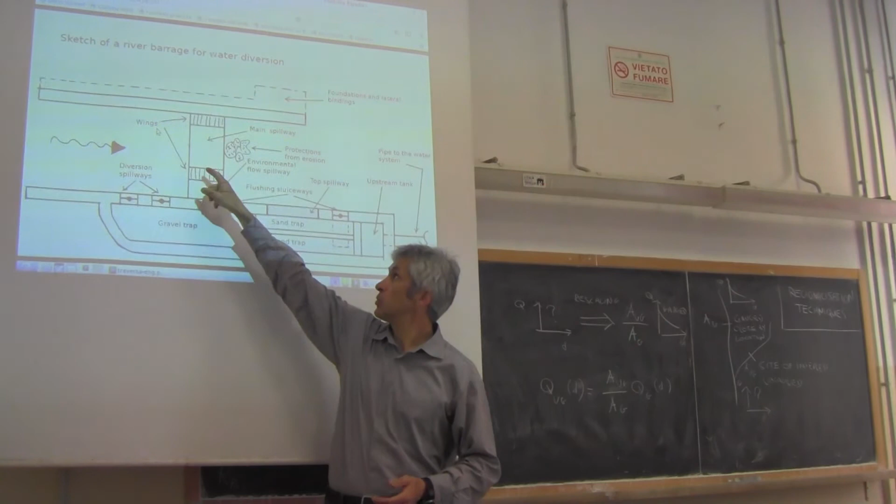Therefore we need to set up a main spillway, located here, which is overpassed only by water in excess of the environmental flow and the diverted flow. The first flow we have to release is the environmental flow. When there is water in excess of the environmental flow, we then start to divert water up to the diverted flow, which is the design flow. When there is water in excess beyond environmental flow plus diverted flow, then the water in excess must be...